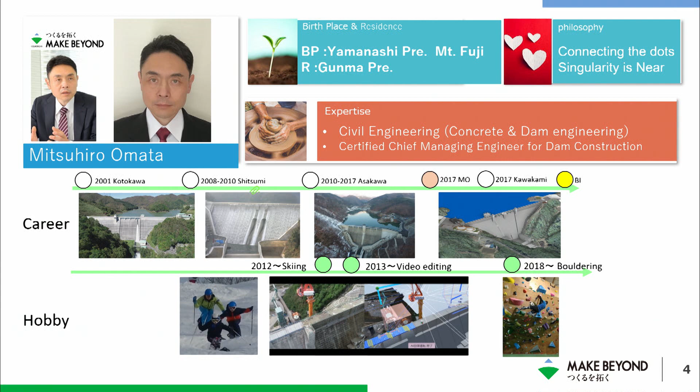Let me introduce myself. After I joined Obayashi Corporation in 2000, I have a long experience in civil engineering, especially in the field of building dams. Today, I'm going to talk about the most recent project in Kawakami Dam construction. Look at the bottom of the slide—there are my hobbies: skiing, bouldering, and video editing.

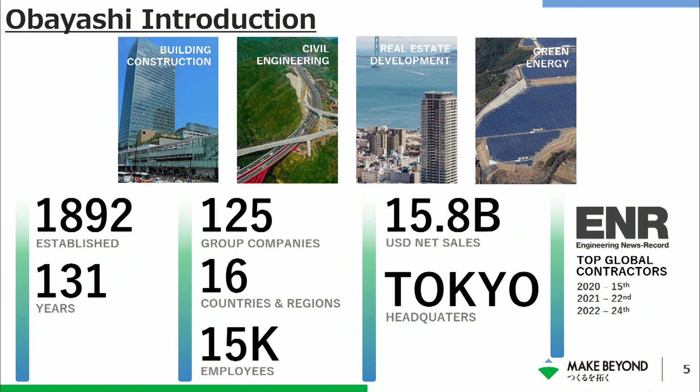This is a snapshot of the Obayashi Group. Obayashi Corporation was founded in 1892, meaning that we are 131 years old so far. It's a kind of long survivor in this field. There are 125 group companies doing business among 16 countries with about 15,000 employees. Our annual net sales revenue reached $15.8 billion, representing the highest rank for the past 6 consecutive years from the revenue point of view.

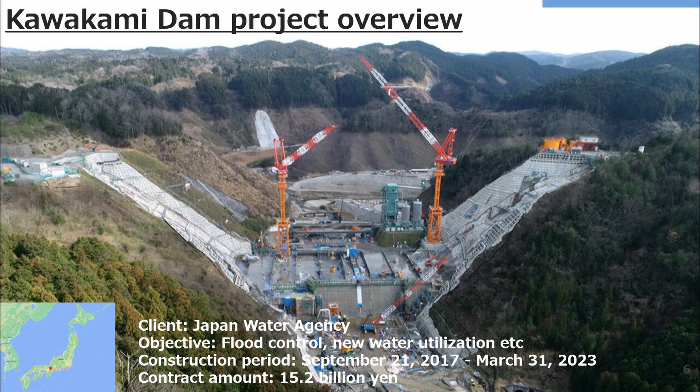The outline of Kawakami Dam is as described in the slide, and the project is to build a medium-sized gravity concrete dam. This is the picture during construction. In this project, because of the short construction period, we automated a lot of processes in our project, which I'll cover later.

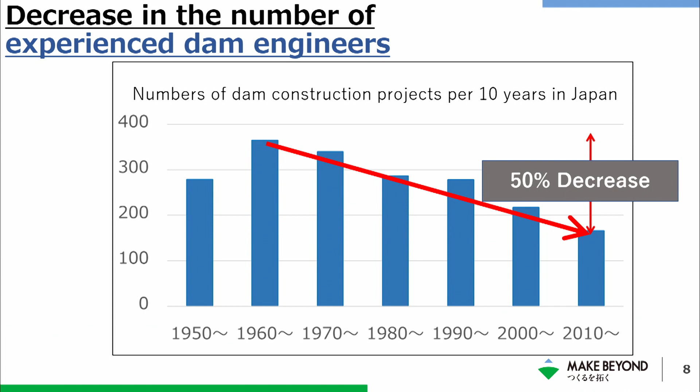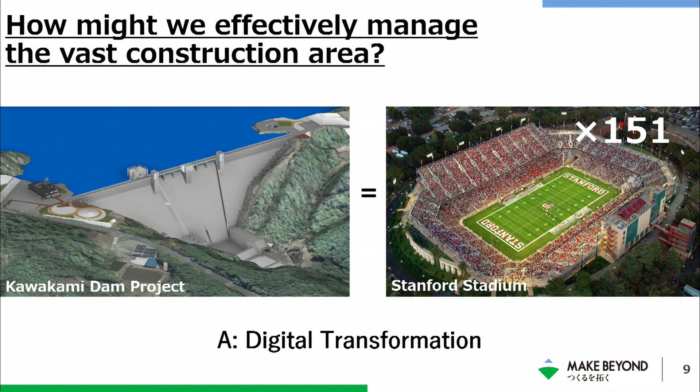So let's move on to the challenges in the construction industry. As Elon Musk worried in one of his tweets, Japan is entering a society with a declining population. Additionally, a decrease in the number of dam projects is also leading to a shortage of experienced dam engineers. So it is important to efficiently manage the vast construction site area with a limited number of engineers. To achieve that and improve the productivity of the construction, we transformed several manual processes into digital.

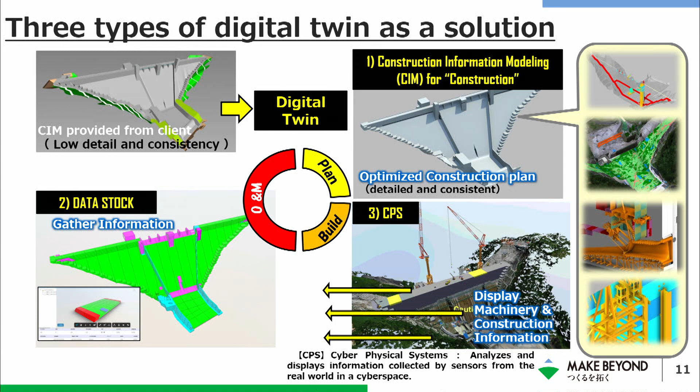The following are the efforts done in this project for digital transformation. We built 3 digital twins from the data that was provided by the client. The first is the construction information modeling, similar to BIM, and serves as an accurate blueprint for construction. The second is the data stock of the construction data. It collects and stores the as-is conditions and will be handed over to our client after completion. The third is the cyber physical system, CPS, that analyzes and displays information collected by sensors from the real world in a cyberspace.

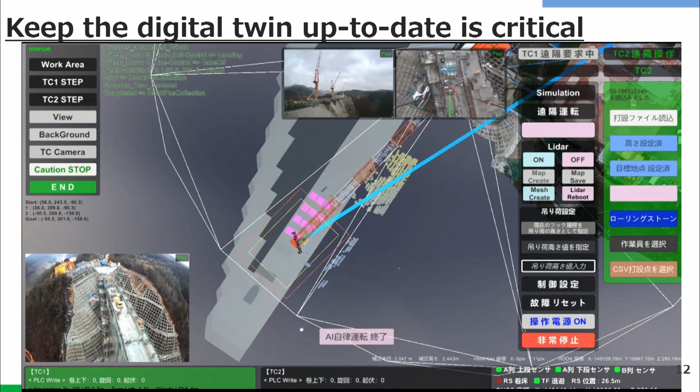For example, you can see 2 cranes operating automatically, which was one achievement of this project. What you are seeing is the CPS, and the small windows are what you see through the camera. 2 things are essential to displaying this dynamic data: one is the CIM, and the other is the static point cloud data that serves as the background.

And these point cloud data should be updated promptly, or the digital twin cannot remain accurate. To do that, we used drones.

For utilizing drones in construction sites, there was a change in the regulation. Before that, we could only operate the drone under the operator's visual sight. However, the revisions to the civil aeronautics law have made it possible to fly level 3 and 4, which are flights beyond the visual line of sight, BVLOS. Since it does not require visual observation anymore, BVLOS flights such as level 3 flight have the potential to increase the productivity of site management.

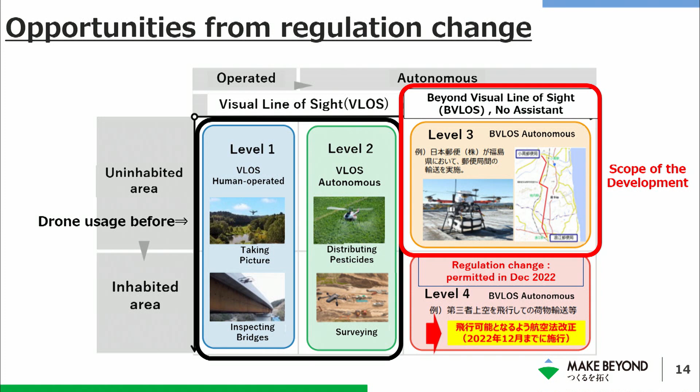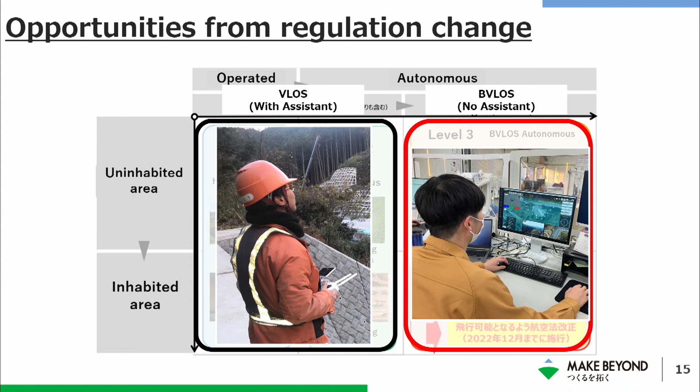Taking this opportunity, we developed the drone and the system so that it can be flown remotely, as shown in the photo on the right. I'll talk about what and how we developed drones.

First, please take a look at this video.

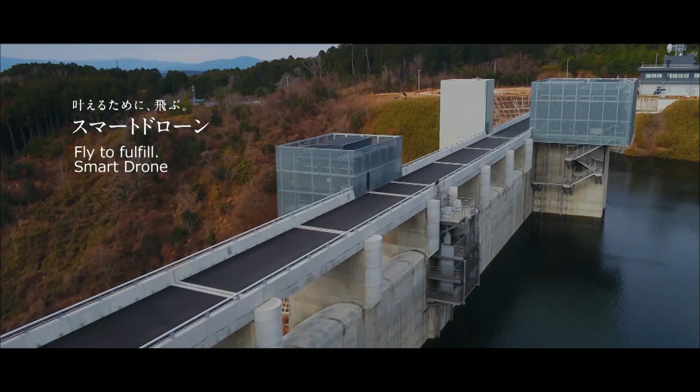In this demonstration experiment, we successfully carried out Level 3 flight. Level 3 flight means beyond visual line of sight flight in uninhabited areas.

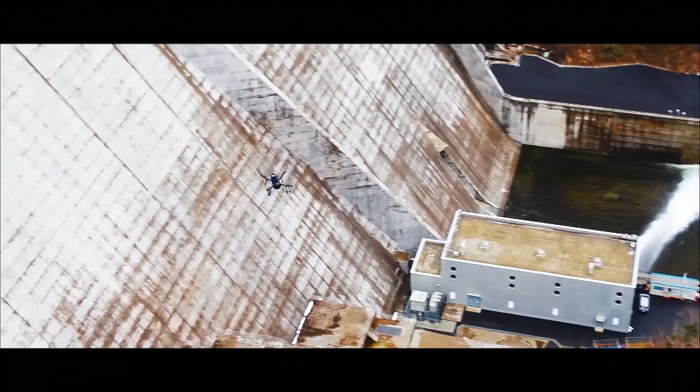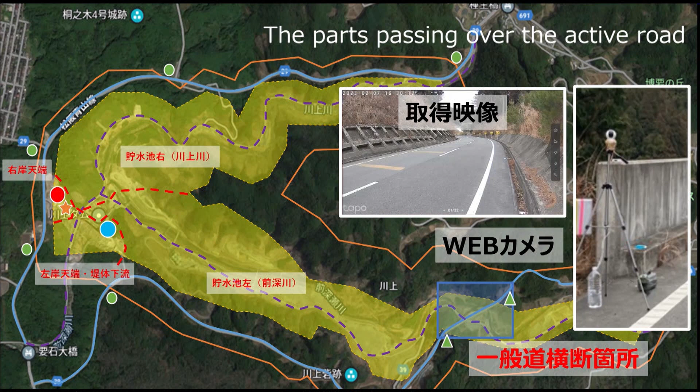We divided the demonstration range into 4 areas and flew our drone. A web camera was used to monitor the parts passing over the active road. A Starlink base station provided by KDDI is installed in the area with poor connection. Covering the area with poor connection enabled the flight with regular LTE communication.

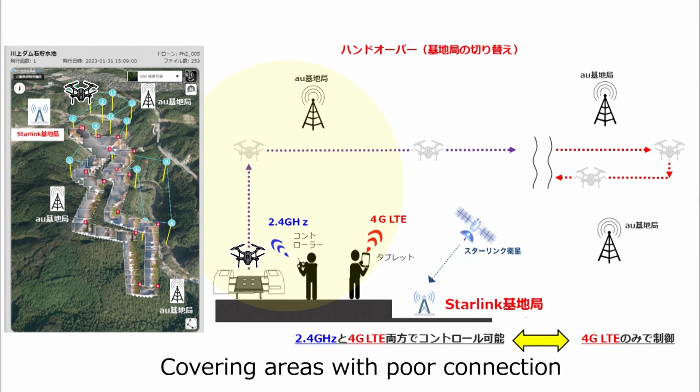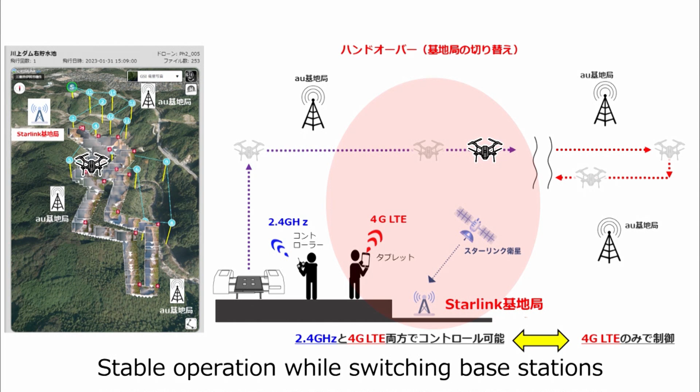The drone flew while switching base stations by a technique called handover, and also flew outside the drone's remote controller area.

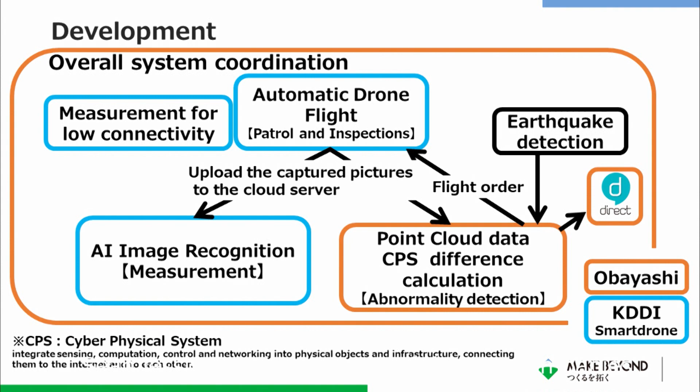In this demonstration experiment, the systems of the 2 companies worked seamlessly together: cooperation with earthquake detection, elimination of weak electric field areas, and Soratena for weather forecast. All of these technologies enabled the Level 4 flight.

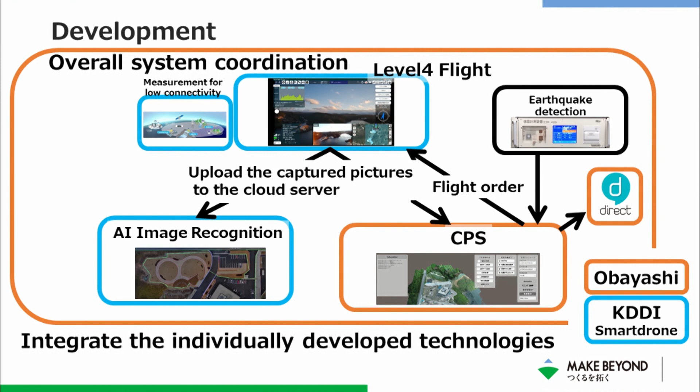After taking the images, it will work with the AI Image Judgment System and CPS. Not just developing individual technologies, we also work on linking and connecting different systems.

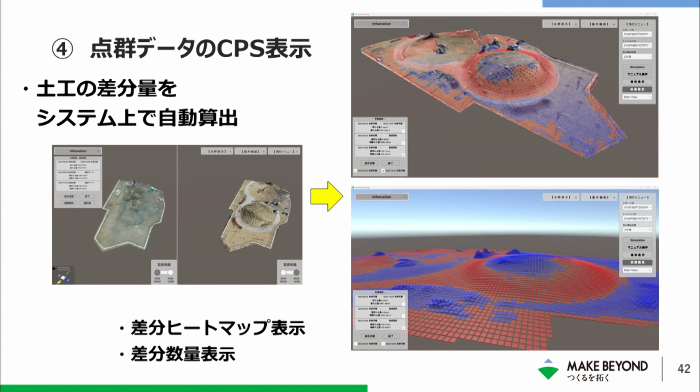The purpose of this development was to improve the productivity of construction management with this technology. Specifically, we built a drone system that automatically performs four tasks: patrols, inspections, measurements, and abnormality detection.

This information was linked to the cyber physical system that centrally manages the job site. We took a partnership with a company called KDDI Smart Drone. Each company brought in their own strengths for effective collaboration.

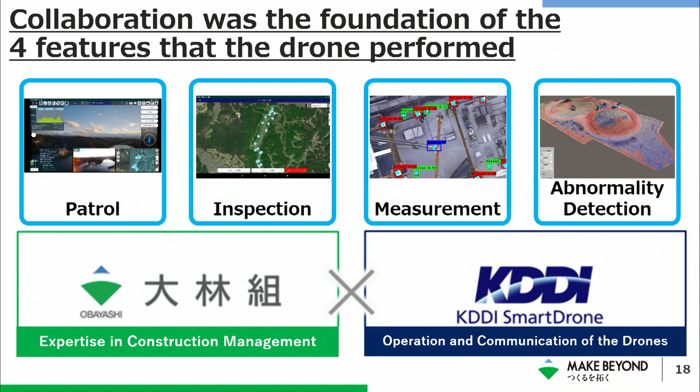One strength of Obayashi is the overall coordination of the development. The following is an overall picture of that development. The orange frame shows the role of Obayashi, and the light blue frame shows the role of KDDI Smart Drone.

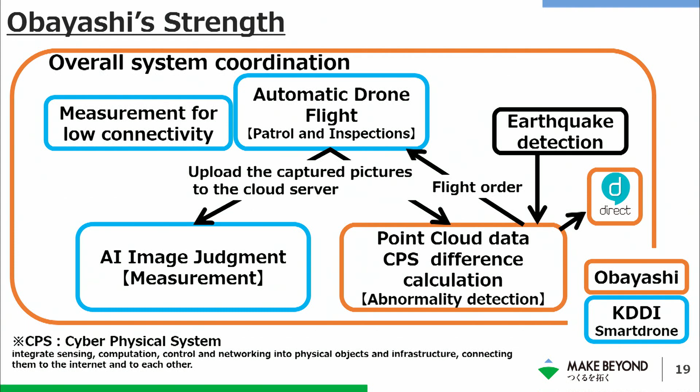The main focus of the development is the Level 4 flight conducted by KDDI and Obayashi. Since this site is in the mountains and had poor connectivity, we are also reinforcing the radio wave. The data acquired by the drone is displayed by the AI image judgment system and the CPS constructed by Obayashi Corporation.

In addition, an emergency flight function has been developed in the event of an earthquake. The two companies' systems are highly linked, and flight instruction can be given from Obayashi's CPS to the drone flight system.

KDDI Smart Drone's capability is operating and communicating with a variety of drones. The drone and drone pod used in this project is made in Taiwan and can perform automatic takeoff and landing and automatic charging.

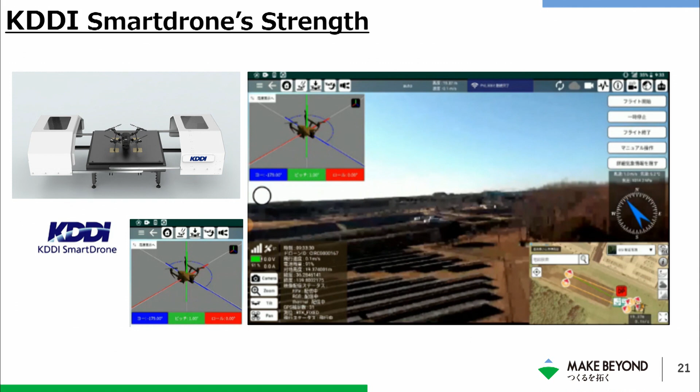Another capability of our partner was to support the poor connectivity area. We installed a Starlink base station from SpaceX so that we can operate the drone flight even in the mountains.

In order to fly over the entire dam project area, the technique to switch the base station of the drone between the existing LTE base station and the Starlink base station was essential. The expertise of KDDI Smart Drone's parent company that operates telecommunications was utilized here.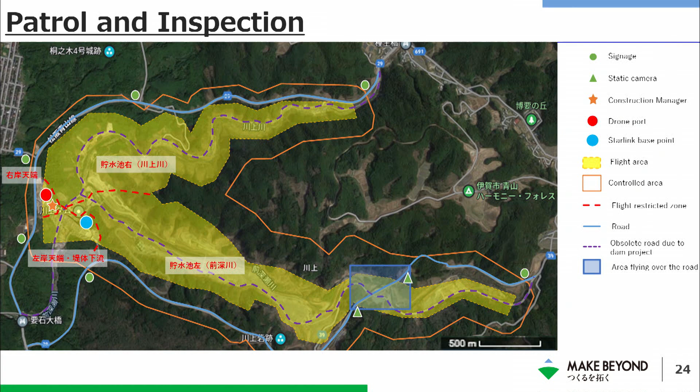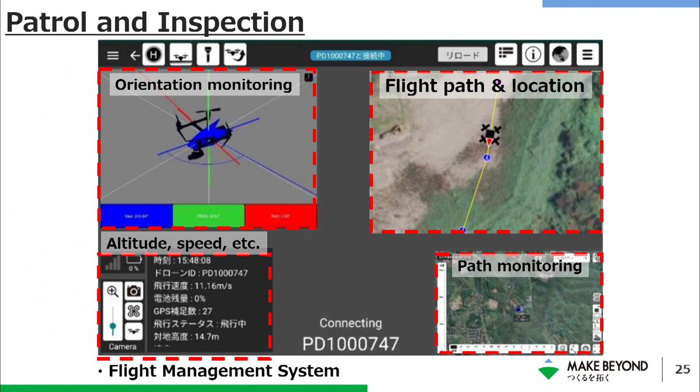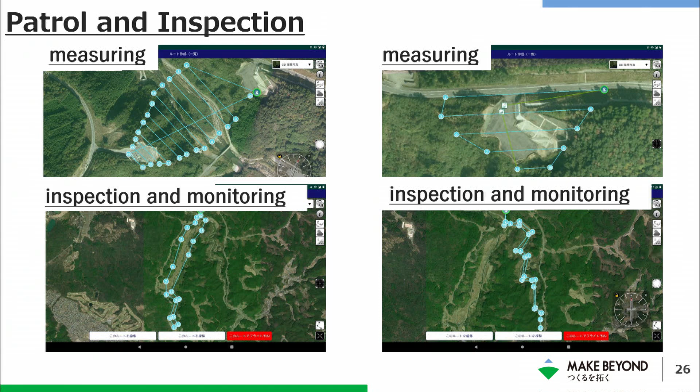These are 4 examples of the flight path. The top 2 are for measurement purposes, and the bottom 2 are reservoir flight for inspection and monitoring purposes.

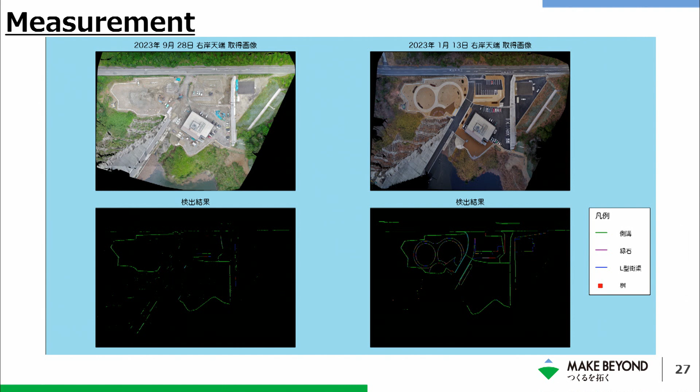For measurement purposes, we developed an AI image judgment system. Using machine learning, the system automatically marked ditches and other areas to determine the progress of the site. The displayed image shows a comparison of analyzed data on the status of dam topside maintenance work. Comparing the images, the line of the detection results are extended, confirming the progress.

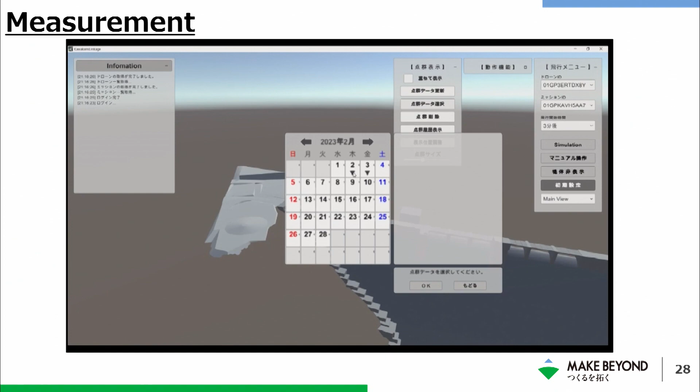Next, I'll explain the CPS display of point cloud system. The point cloud data that forms the basis of the CPS is uploaded onto the KDDI cloud. We have developed a system that easily imports this data into the Obayashi system and displays it.

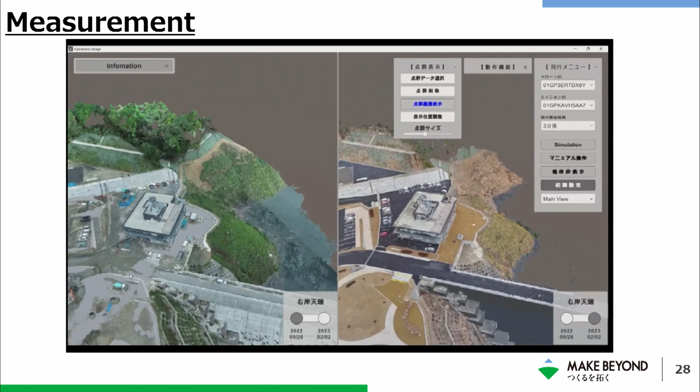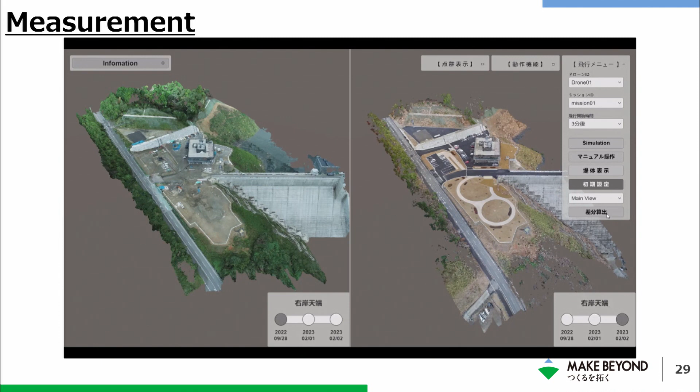Past data comparison can also be performed. The screen works like this. In addition, we have developed a function to cut any area on this system in a polygonal shape and calculate the amount of change in soil volume.

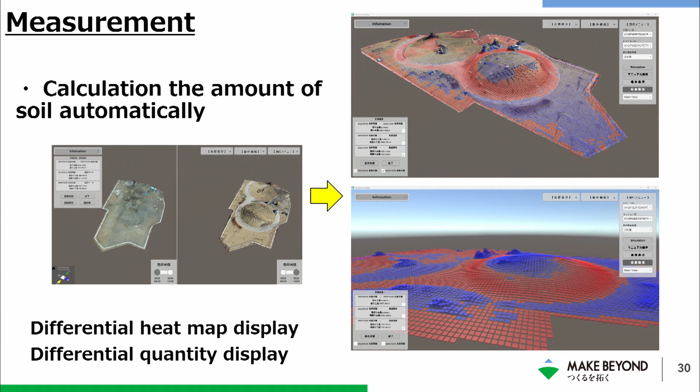Heat map display and calculation of the difference in the quantities are also available. In addition, arbitrary cross-sectional displays can be easily performed.

We also conducted a flight for abnormality detection of the reservoir, which is more than a 5-kilometer round trip. These acquired photos were uploaded to the cloud immediately after the flight, and time series comparison can be made on the cloud.

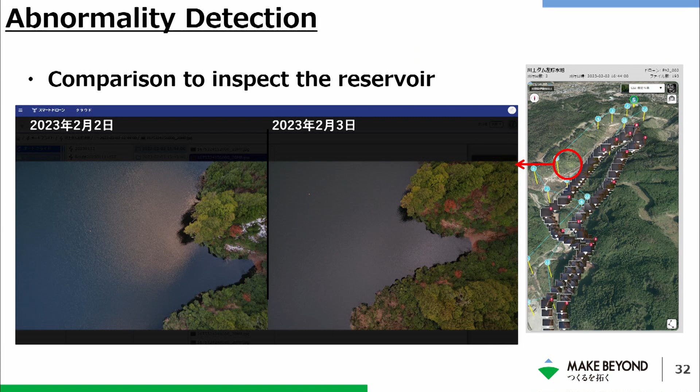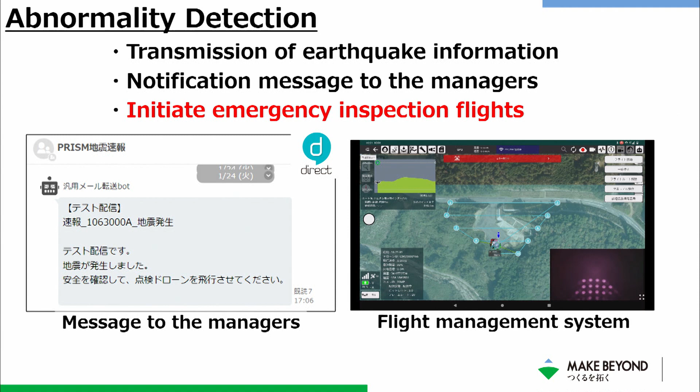Finally, I'll explain the emergency flight function in the event of an earthquake. Information on the occurrence of an earthquake is sent from Obayashi's system to the drone side system, and an emergency flight can be automatically booked. At the same time, a notification message is sent to the chat application.

Here, I'll introduce 3 AI image evaluations. Kawakami Dam construction project has been working on AI-based productivity improvement initiatives for some time now. Here, I will introduce 3 of them. Please see the video.

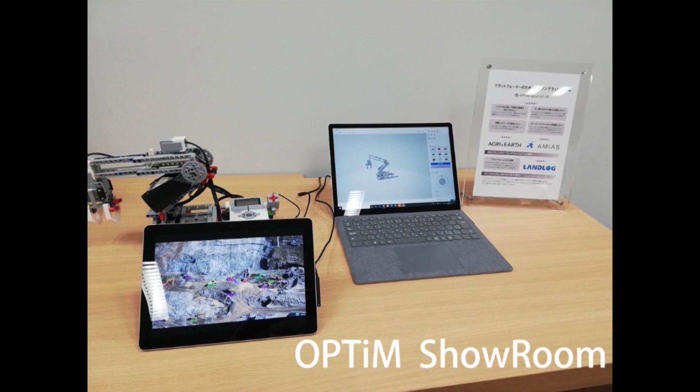The first initiative is management of excavation machines with AI. We train the AI model to analyze the productivity of the machines by identifying the type and movement with bounding boxes.

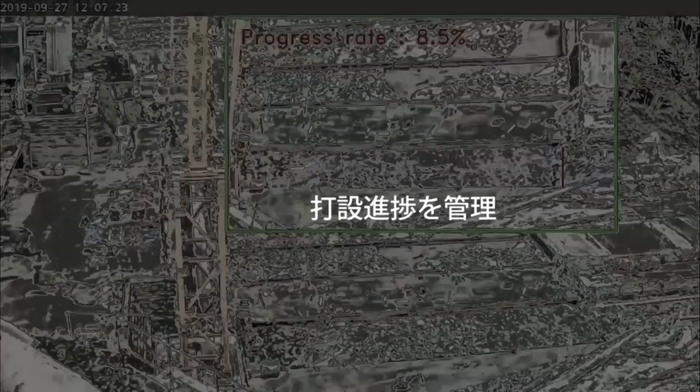The second initiative is management of the progress of concrete pouring. Here, we develop the AI to segment and identify the poured area. Additionally, this segmentation identified the human and machine movements as well.

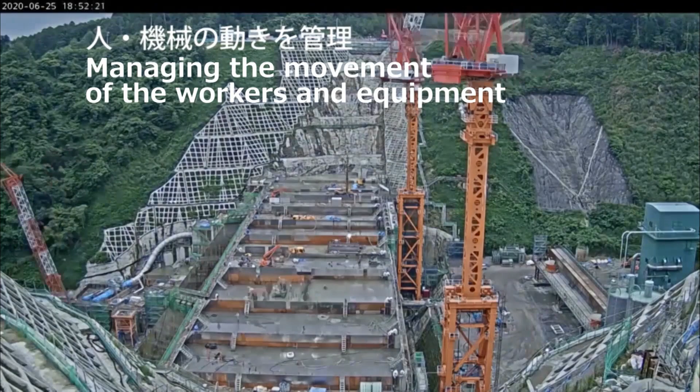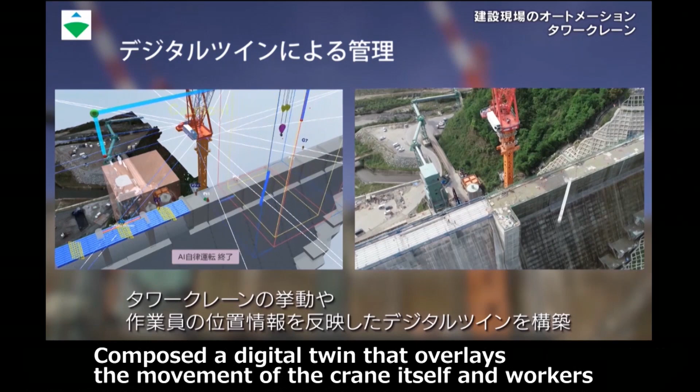The third initiative is the autonomous operation of tower crane, as we saw previously together. This attempt involved 7,000 hours of AI training.

For the next steps, I'll name 3. First, we aim to achieve stable flight under LTE communication environment for level 4 out-of-sight flight without assistance in a human-occupied area. Second, we will promote the operation of multiple drones. Third, we will develop more use cases with the CPS.

For the overall summary for today's talk: Kawakami Dam has been challenging new technologies through field-oriented development. We are aiming to improve the productivity of on-site management through technologies. And the people on-site who are at the forefront of construction need to connect the dots and lead to the development of the technology.